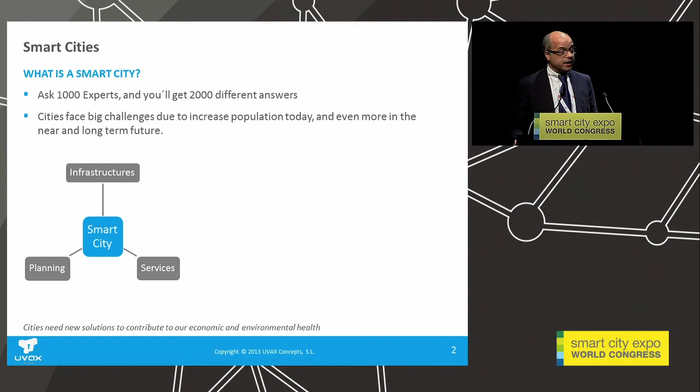If you look at the most important tasks a city has to take care of, it's planning, services such as healthcare and education, and also infrastructures. Infrastructures we can divide into 3 blocks: transportation, water, and energy. Energy being probably the most important one, because without energy everything else breaks down. So energy has to be what cities, if they grow, are very concerned about. Otherwise cities are not going to be sustainable, and sustainability is definitely one of the big issues today.

The only way to cope with that is with smart grids. Cities are the most important factor within this smart grid, and they have to deal somehow in a smart way with energy consumption.

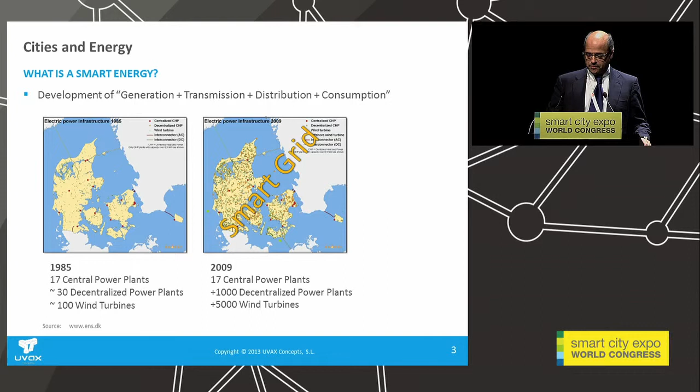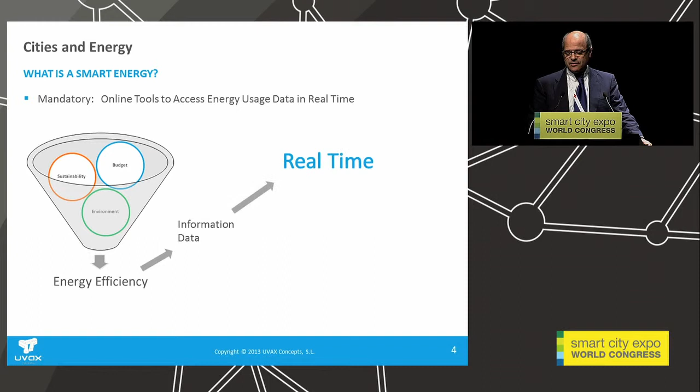So let's look at the basics of smart energy. What does that mean? On one side, what we want is low cost, that means cheap energy. But we definitely also want it to be sustainable and environmentally friendly. The only way today to approach this is doing good work in energy efficiency. But you can only do good energy efficiency if you have data and information, and that information should be in real time, because that's the only way you can react and also predict, using smart analytics to see how you can be more energy efficient. So the focus is definitely going to be on real time.

That's essential. Now, if you talk about data and information in the energy sectors, a big part of it is smart meters, because they are the ones measuring and getting all the readings and information about habits in energy consumption. So real time is important, but before we go deeper into the smart meter sector, let's see what's happening in the industry right now worldwide with information exchange.

Now, if you take real-time information from smart meters, that means we are going to have 15-minute readings. So this is going to add an additional 96 billion readings every day to the whole information that we are going to transfer, because what we expect in the next 10 years is that there will be at least 1 billion new smart meters worldwide.

And that's why experts predict that from 2010 till 2020, the information exchange worldwide will increase by 44 times, which is amazing. We are talking here about 35 zettabytes, and a zettabyte is really big data, because that's a number with 21 zeros.

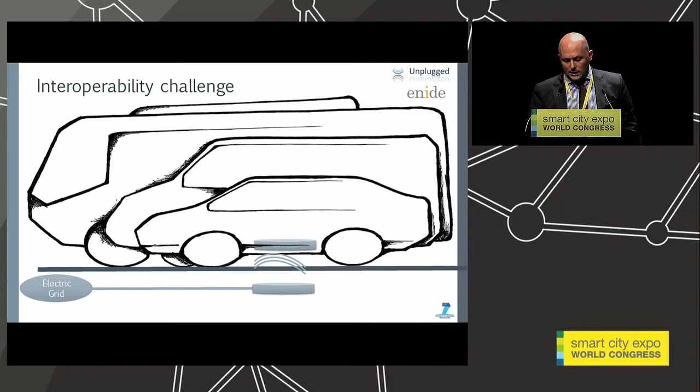So interoperability is the main open challenge in this field. The technology exists - you can go to trade shows and there are already solutions there, prototypes more or less close to market. But when we think of a solution, we need all the solutions working together. We need to be able to charge a light-duty vehicle, a car, perhaps a bus in another area, but we need to charge all of them no matter which car manufacturer or country they come from - it could be DHL or somebody moving their vehicle fleet from one country to another, and they all have to work together, including all the billing, no matter where we charge them. Only this will make the electric vehicle a reality in the near future.

So thanks, and for more questions, I'm available later. Thank you.

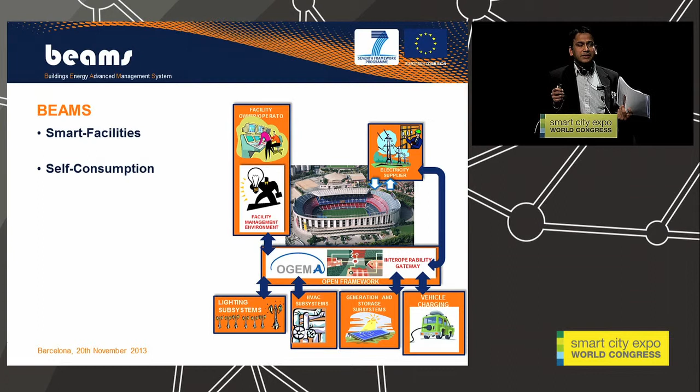How can we increase our self-consumption in our facility? In this project we have PV, which is the main resource of this facility. We also have load: the on-demand load, like lighting, which you cannot postpone, and the postponable load, which is somehow like storage. We have the HVAC system, which is like thermal storage, and electric vehicles, which is electrical storage.

That is what we have done in this project: we developed a decision support tool for the facility manager to decide which size of PV and which size of battery is most useful for our facility, not only from the technical point of view but also from the economic point of view. It will be run by the facility manager. That is the basic concept at the facility level.

What do we need for these tools? We need the power production profile, which you can get from historic data, and also the load profile, which you can also get from historic data, or from simulation.

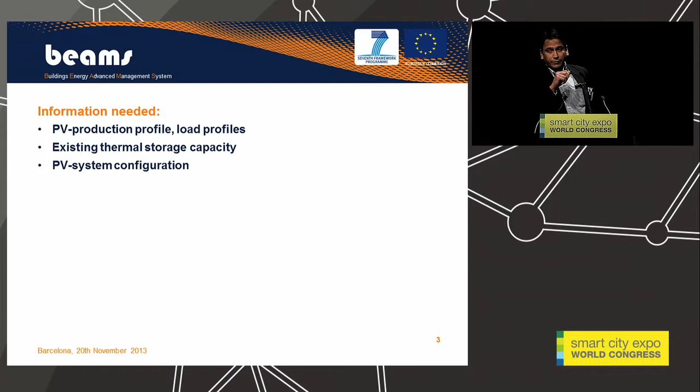That is an example we took from one facility to run the tools. You will see we have the electrical load from different buildings and public use, as well as the thermal load, which is the HVAC load.

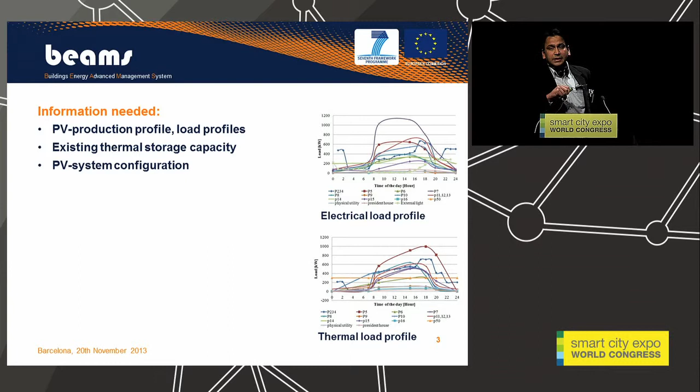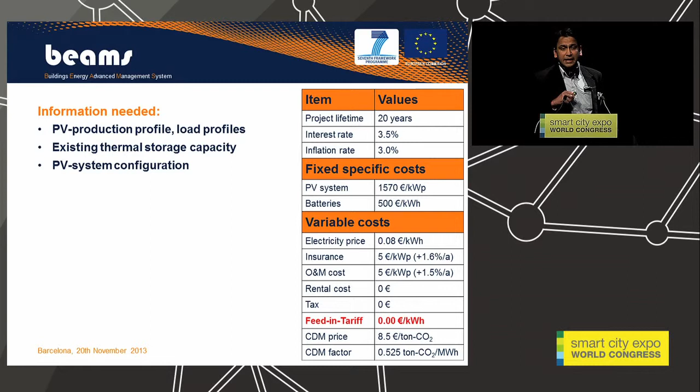Afterwards we also need the PV system configuration—things like inflation, size, cost, and the feed-in tariff. From our research point of view, in a later slide I will show you what happens if we don't even have any feed-in tariff. Does it make sense? What size of PV is more useful for us?

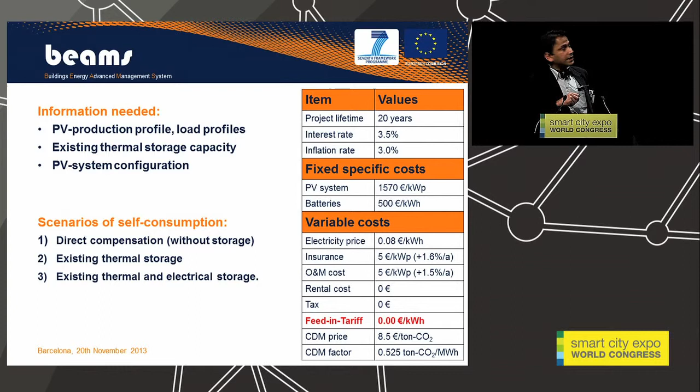We have done this in three scenarios: direct compensation without any storage, with existing thermal storage which is the HVAC, and with existing thermal and electrical storage together, which includes the battery.

That is the first figure I would like to show you from the technical point of view. You see the self-consumption from the load point of view: once you increase the PV peak, the percentage covered from the load side increases—for instance with 100% load, installing a 5 megawatt system for this facility gives around 19% covered by PV. It starts to saturate due to power consumption patterns during the day and night, so it doesn't make sense to increase the PV further.

But from the PV side, once you have 5 megawatts, all of your PV will be consumed in your facility. Once you increase the size further, you cannot use it all anymore—you can use, for instance, only 80% at 20 megawatts, and the rest, 20%, will be fed into the grid. That is from the technical point of view.

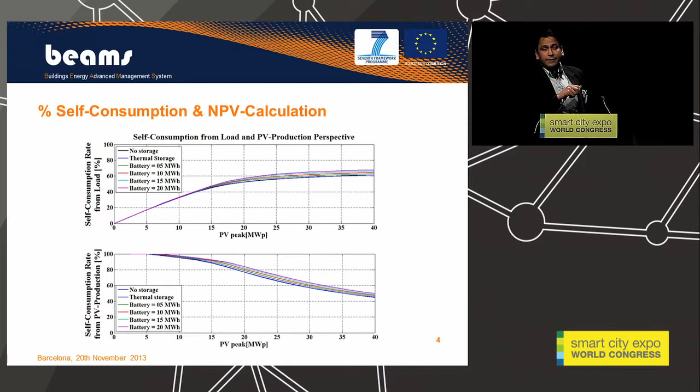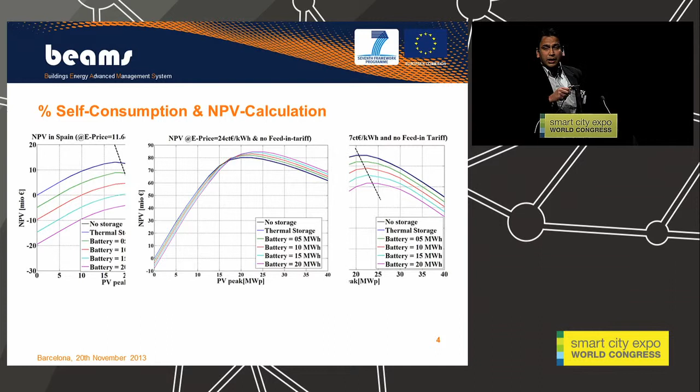All of this, I want to show you only different contexts. In Germany, in Italy, in Spain, in Singapore, or whatever, the decision maker will be completely different based on different contexts. It is very important for facility managers to design what size of the PV we need, and also the type and size of the storage. Afterwards, once you compensate with the electrical load, the residual load profile, you can use them to bargain with the energy purchaser in order to have a cheaper price for your electricity bill.

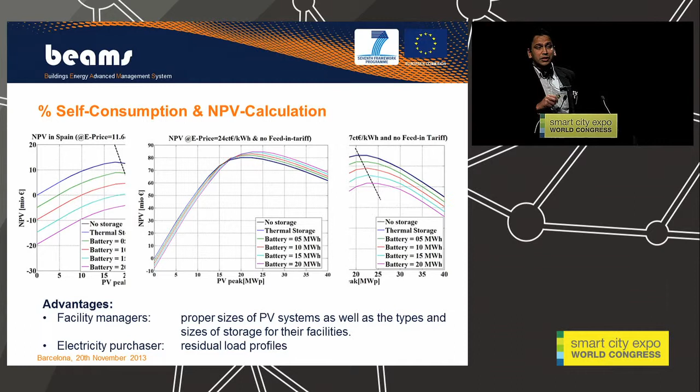And that's all from my side. Thanks a lot.

Good morning, ladies and gentlemen. My name is Jan Schabert, I'm an architect. The keynote which we saw yesterday from Kent Larson addressed that architects are so restricted in what they can do, that they cannot combine different systems. And I completely disagree on that.

What I want to do, and what I think is essential for architects to do, is to play with these systems and not work for the industry selling their products, but inventing or changing products. And that's what I want to do.

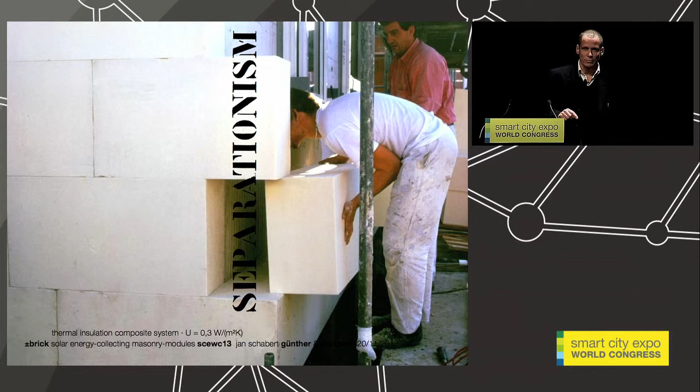What we see on this slide, you can see it as good or bad. This is pumping energy. We've got bricks, I was researching on bricks. We've got a brick facade and some machines pumping energy in or out, using some kinds of fossil fuels maybe. I think there's a lot of mileage in using this facade to pump in and pump out some energy.

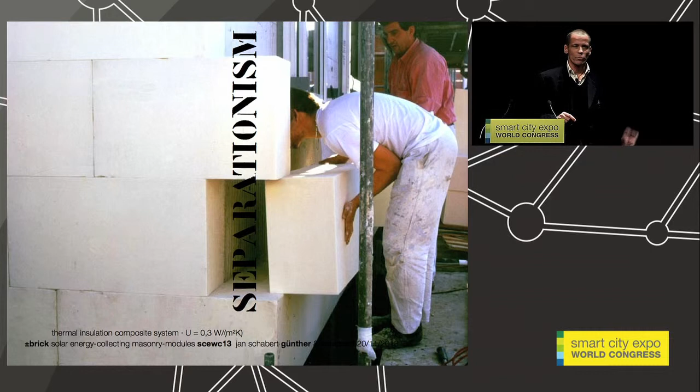On the positive side, we have here, fantastic, in Germany we insulate our buildings with big insulation material, which is like saying to the environment, we don't like you, we don't like the environment which we have out there, so stay out, we don't want you in. This should be really separated. So maybe it's not so fantastic after all.

So I was trying to look into this brick and see if we could use it somewhere, look really inside and see what it can do if we turn it inside out. If we have this brick not being an insulator, separating inside and outside, but trying to bring in what the sun gives to us. At EKWC in the Netherlands, the European Ceramic Work Center, I was developing and trying several ways for how a brick could do something more, pay back what has been put into them, the fossil fuels used to fire them.

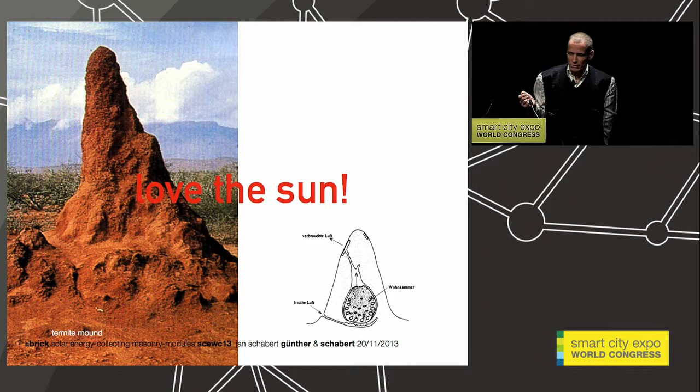And so I came to this approach: not to defend from sunlight and stay out with lots of insulation, but love the sun and let the sun in, try to do some heating and some cooling too. And we do that not with high technology, but with this termite technology, where they can cool their buildings like that. So I developed this brick here. This is the outside, obviously. We've got the sun on the outside of this facade, and we've got cavities.

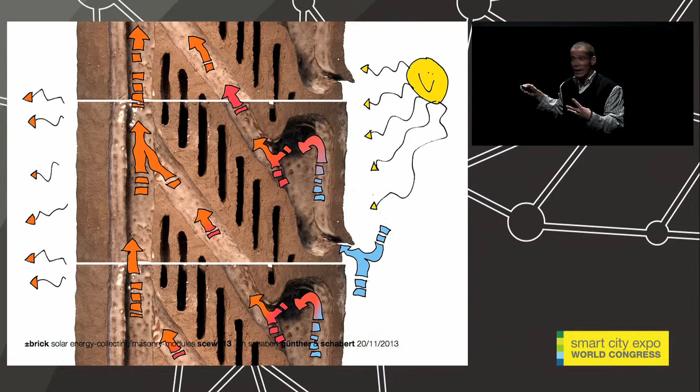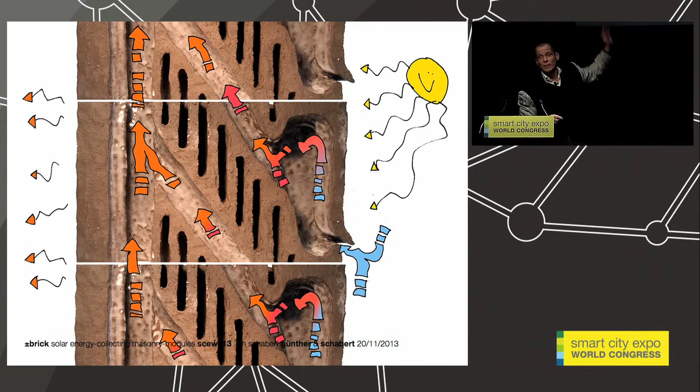We've got these cavities behind the outside surface. In these cavities, the air is heating up and it wants to go up, but it can't go straight up, so it has to go up in this diagonal way, towards the inner surface of the outside wall, which is heating up by that strategy.

If we want to control that, if we don't want too much heating in this building, this is what happens if you have insulation - it's always insulated, day and night, summer and winter. If we want to change that, we can have a simple flap opening on top of the wall, which lets air through or not. If we close that on top, the air stalls in there and isn't moving, not transporting any energy anymore. So we've got an insulating wall.

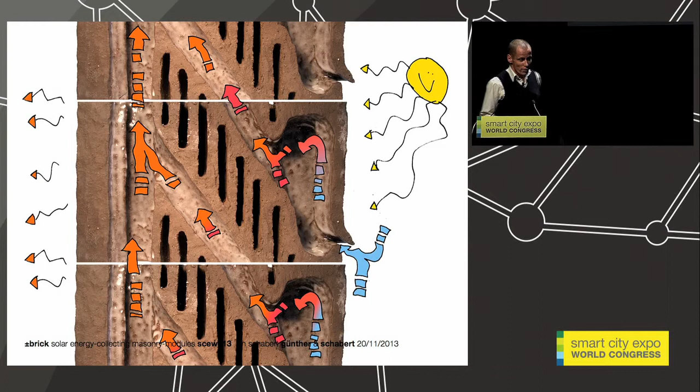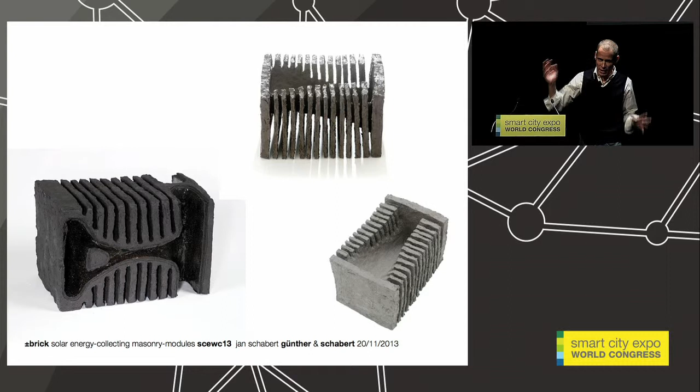We tested that in several different ways. We've got an alternative too, which is sucking in air through the foundation and bringing it up if you want to cool the inside of your building. So that should work as well.

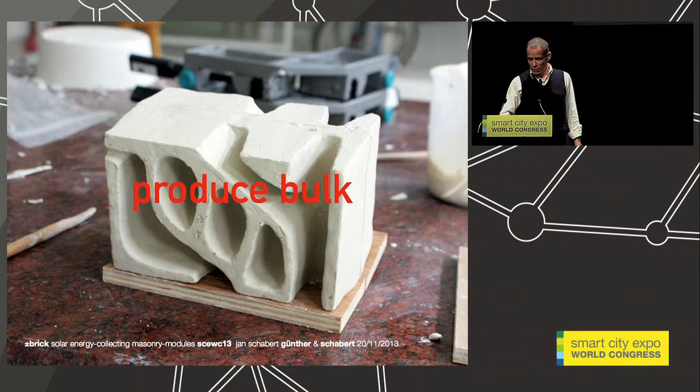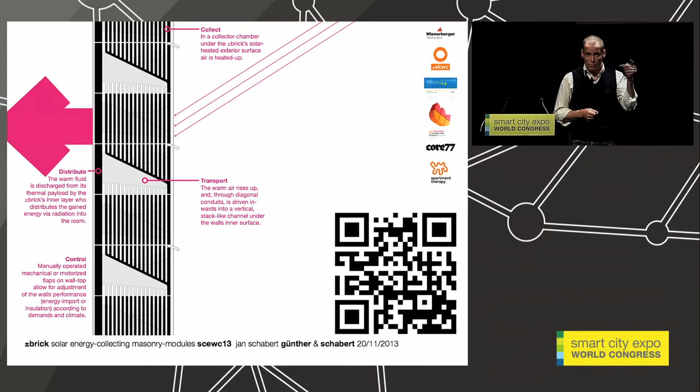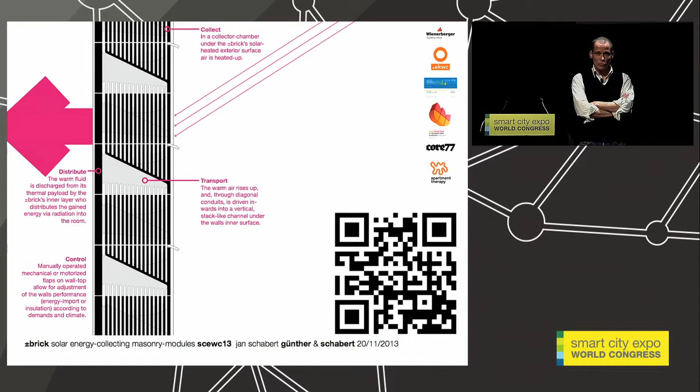So this is how it works. So far we're at this development stage, having this idea, but the industry, which expects us as architects to follow them and ask for their products and just buy them, has not bought our product yet. So they're staying with their products and are happy with the insulating strategy they have so far. Let's see if we can get some brick industry to produce this wonderful brick and save the planet. Thank you very much.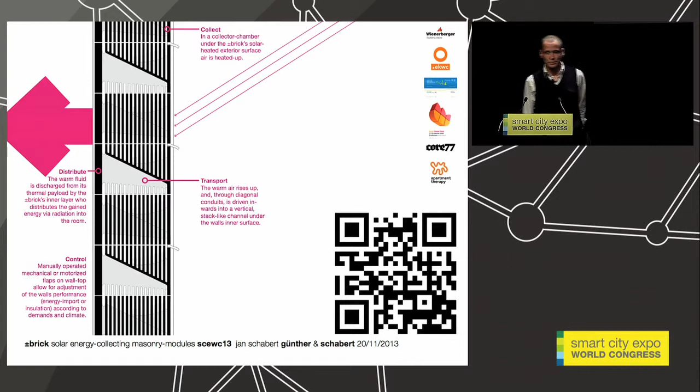Now is the time for Andres Jaadla from Estonia. He's Director of Development and Education in the Rakvere Smart House Competence Center. Mr. Jaadla, as Mayor of Rakvere City, initiated the European Covenant of Mayors in Estonia. He was Vice President of the Union of the Baltic Cities from 2009 to 2012, and a member of the EU Committee of Regions from 2002 to 2012. He holds a Master of Law from the University of Tartu, and he will present the Rakvere Smart House European Covenant of Mayors.

Thank you everybody for this possibility to participate in this World Congress here in Barcelona. I'll speak a little about politics. We speak in this conference about how we can change cities into smart cities, and I bring an example from one small Estonian city called Rakvere. I have a lot of slides, but I'll run through them quickly.

As you can see, what we've been doing over the last 5-6 years is changing the city profile, promoting the city, investing in Rakvere. Rakvere is maybe unknown here in southern Europe. It's a small city in Estonia, 100 kilometers east of Tallinn, our capital, and 100 kilometers from the border of Russia. We have quite an old city, almost 1,000 years old, with 700-year city rights. Estonia generally is a very small country, and this is our 7th or 9th largest city, approximately 17,000 inhabitants - in Europe that's not a big city, more like a town.

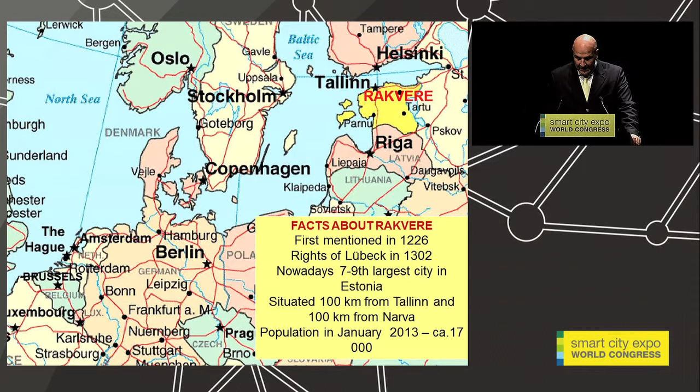What we are doing and how we've changed our city profile over the last years - here are some facts about Rakvere. About myself, I've been mayor of the city of Rakvere for 10 years, working quite actively internationally and at the European level. We started changing with the Covenant of Mayors initiative of the European Commission in 2008.

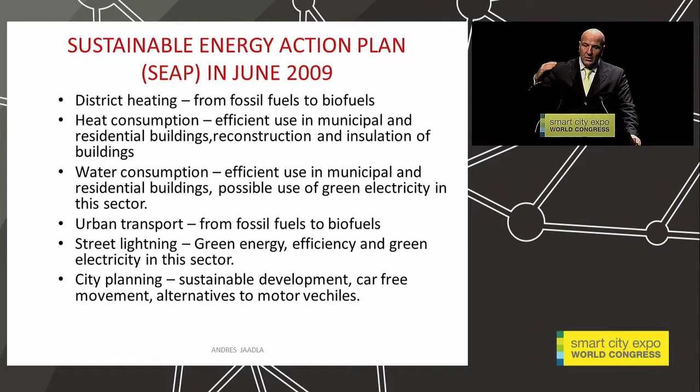In 2008, the European Commission invited all mayors together to say we must save CO2 by 20% by 2020. Rakvere was one of the first to sign the Covenant of Mayors in 2009, and that same year we made our own city SEAP, Sustainable Energy Action Plan. This means at the political level, in the city council, we decided we must invest in 6 key goals: district heating, heat consumption, water consumption, urban transport, street lighting and city planning.

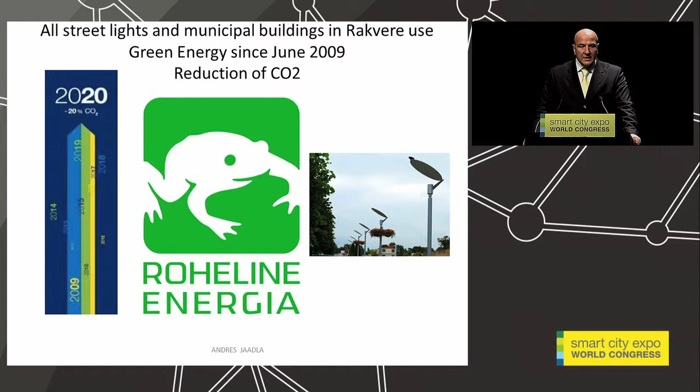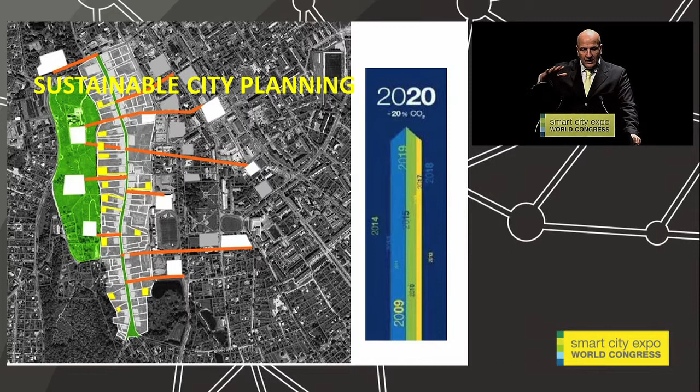We made quite a concrete plan for what we can do and invited investment for such activities. By 2009, all street lights in Rakvere and public buildings used green energy, not produced from fossil fuel. In 2009, we adopted a sustainable city general plan for how we can develop the city in a sustainable way.

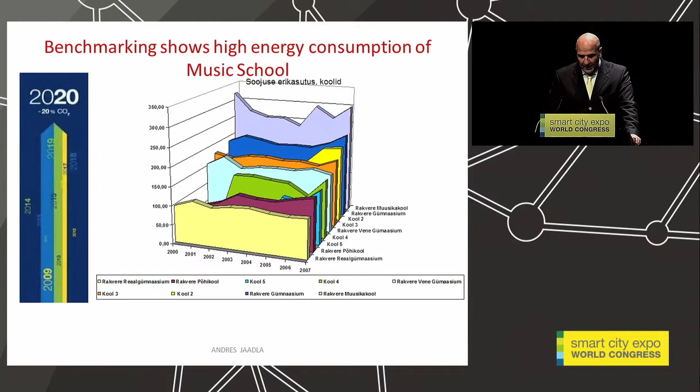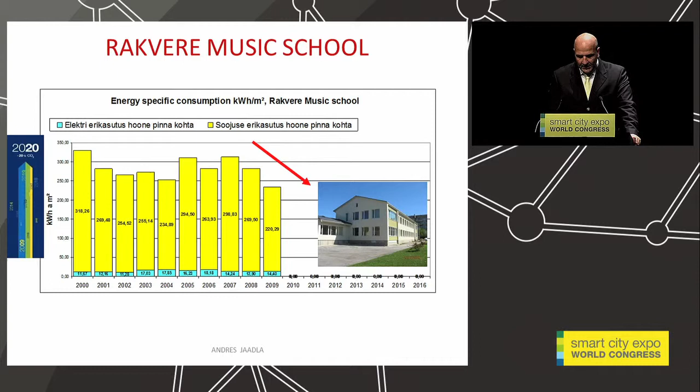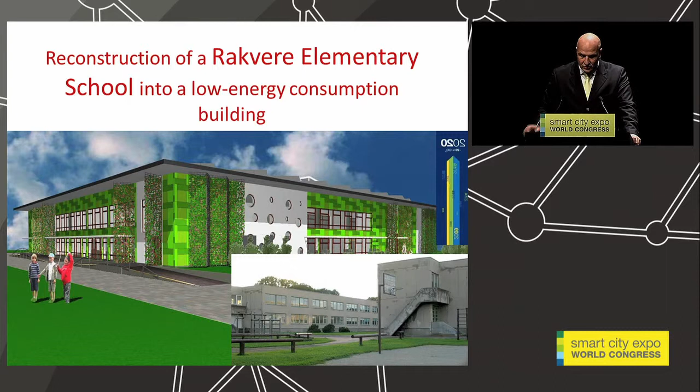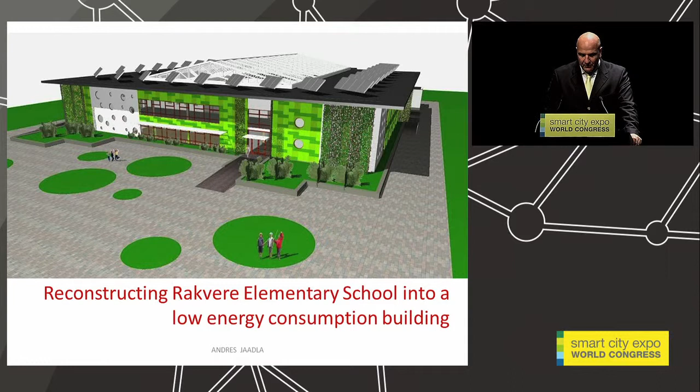Another project involves our old Soviet time buildings. We want to build a low energy consumption school, Rakvere Elementary School, and this building will be ready next year. Now we have financing, and the process is already going on.

Another thing we are thinking about is how people living in housing cooperatives in big buildings can save energy themselves.

You see this one region in Rakvere where approximately 70% of the city's inhabitants live. We made a plan for the street and invited into this process not only city planners, but also the people who live in the housing cooperatives, to change the view of the street and at the same time insulate the buildings. This involves 16 housing cooperatives, and we are making the plan together.

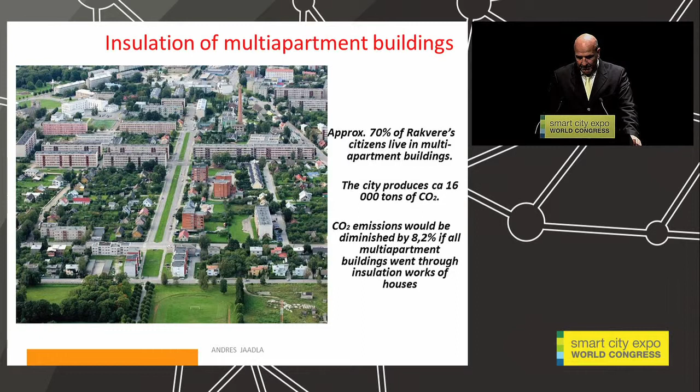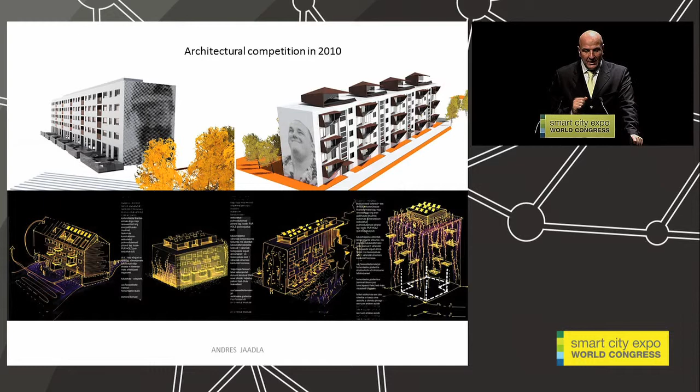And here you see the works of architecture.

The other big project I lead now, though I'm no longer mayor, is Rakvere Smart House. This is a Smart House Competence Center in Estonia, which promotes smart solutions from Estonia to other cities. We want to be in the center of intelligent urban space in Estonia and Rakvere. Here we organized an architectural competition between old and new buildings, which has now finished.

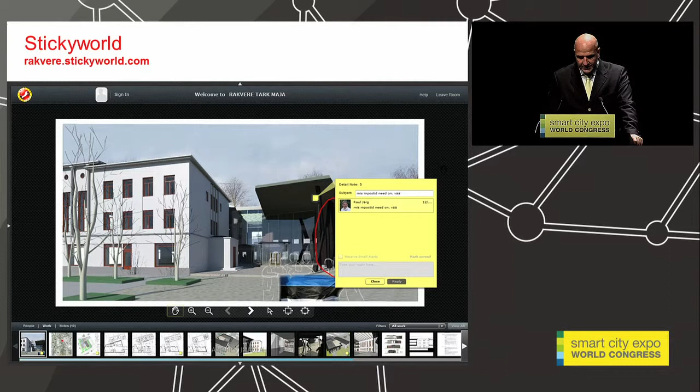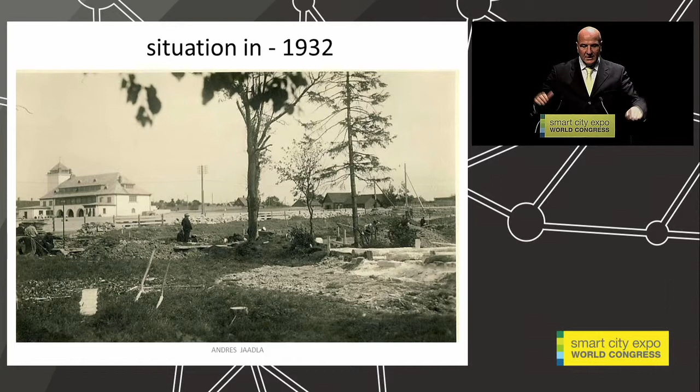Here are a lot of pictures. This old building is really very old, and here you can see a picture from, I think, 80 years ago. Rakvere is like a small village, and if you compare it over 100 years, you see how much Europe and the world is changing, starting from small cities and going to bigger ones. By the 1930s, this building already existed. This is part of our center today.

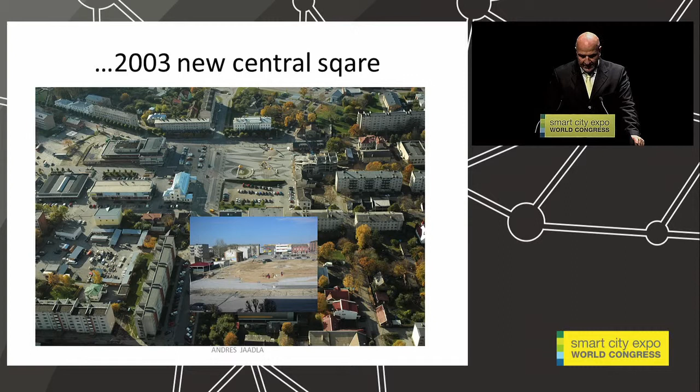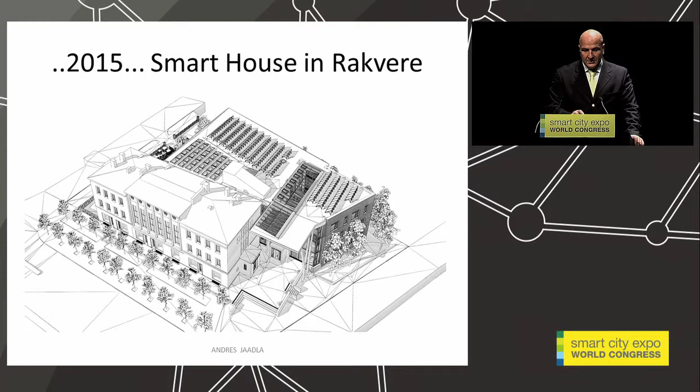In 2003, we renovated Central Square in front of the building. Now you can see the picture. And by 2015, the new part outside the old building, the Competence Center in Rakvere, must be ready.

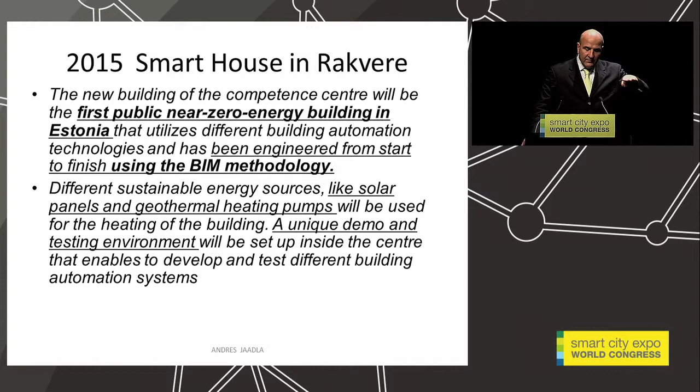This is the first public near-zero-energy building in Estonia. We made the entire plan for architects using BIM. This was really a big work for us. Here are some more pictures of how the house could look in the future.

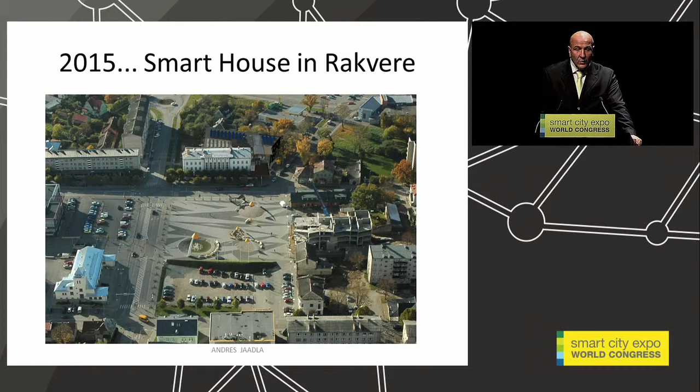By 2015, after the building is ready, you are very welcome to visit Rakvere. Here are some pictures. My time is now running out.

Five minutes is especially for the politicians. We could talk for hours here, but I'll just run through some pictures.

We have one of the 6 centers.

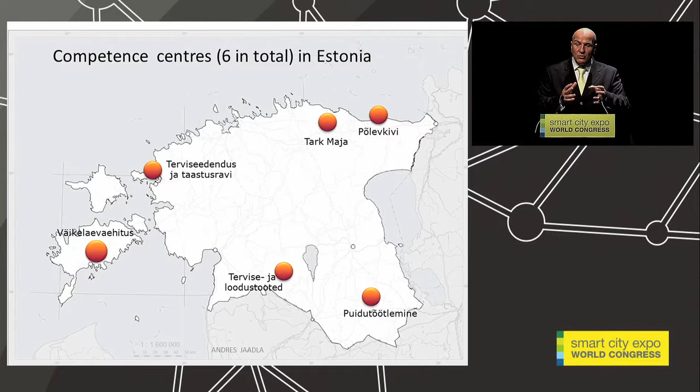The other thing I must say, maybe with one extra minute, is that if you have a small city, you must strongly promote it in Europe, and we have been quite active in doing so. We are a member of the Smart Cities Council, and we have a lot of projects underway.

With results coming from 6 years of work, we obtained 47 million euros for a small city like this, where the overall city budget is 11 million a year. Over a 3-year budget we used this concept from 2009, the Sustainable Energy Action Plan.